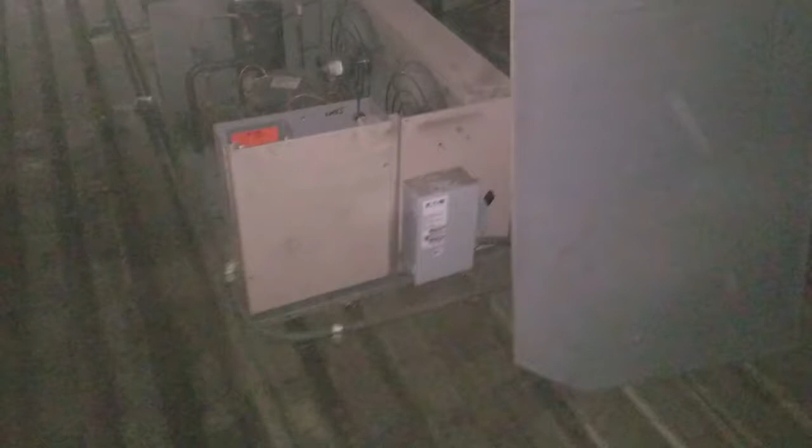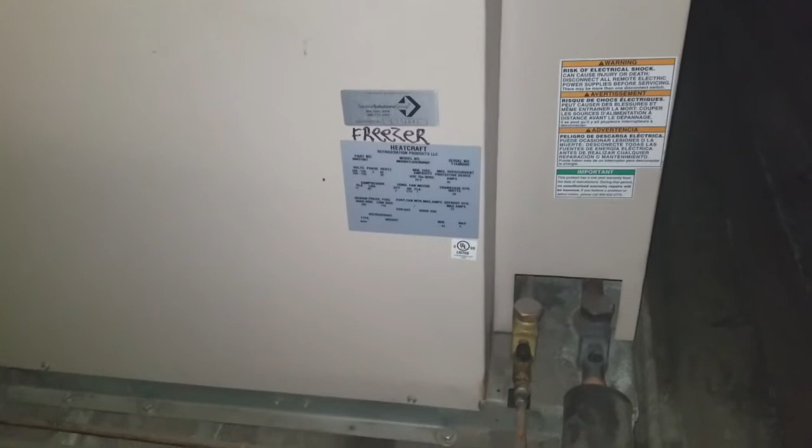So we've got a walk-in freezer that's not working properly. The complaint is that they're getting frost all over the walls of the unit. Upon arrival, I did not see any ice on the walls. However, I did notice that the door hinges and closure are not closing the door properly.

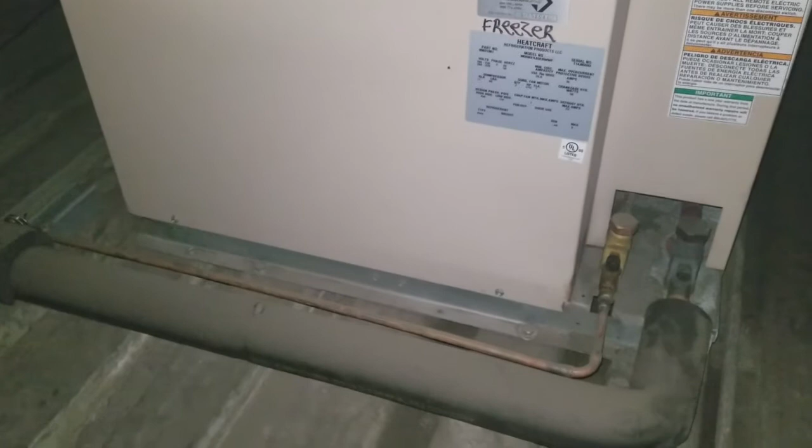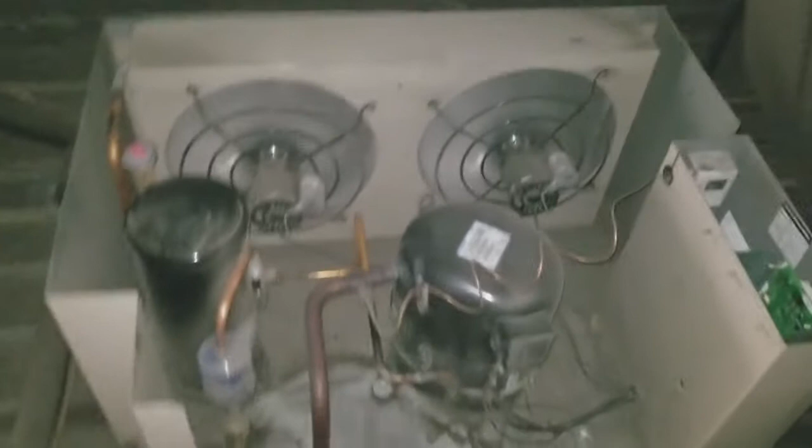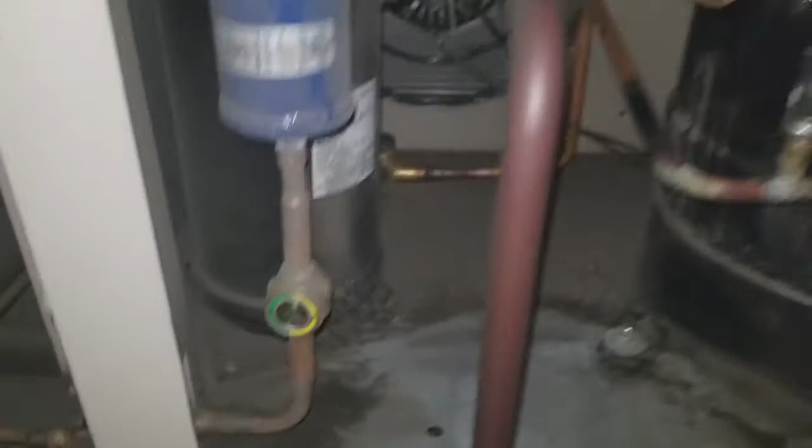They're currently doing a product rearrangement in the freezer, so I'm going to come up on the roof and check out the equipment. It's a Heatcraft condensing unit. So we've got a head pressure control valve. Sight glass currently looks clear. We'll go ahead and gauge up and check everything out.

So the first thing I noticed when I put these gauges on is that my superheat was a little bit high. Now, granted, this is the superheat at the compressor, currently at 46 degrees, but I'm going to go ahead and click over to the evaporator superheat, and you're going to see that's running actually kind of high too. So here we go, and we're at 20 degrees evaporator superheat. We want to be a lot closer to 8 degrees on this particular box.

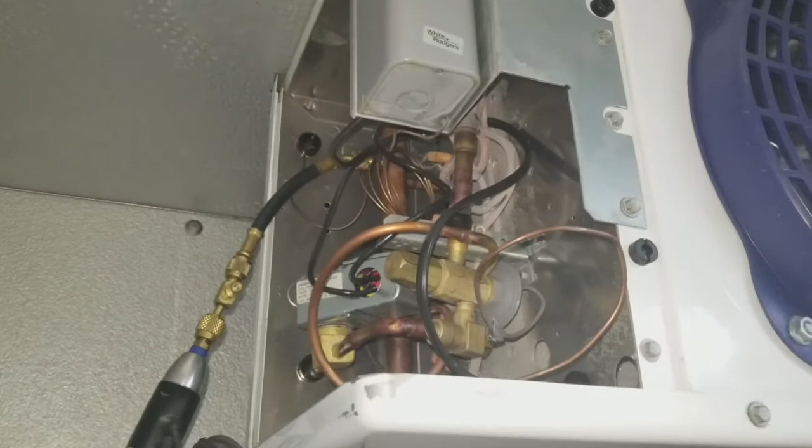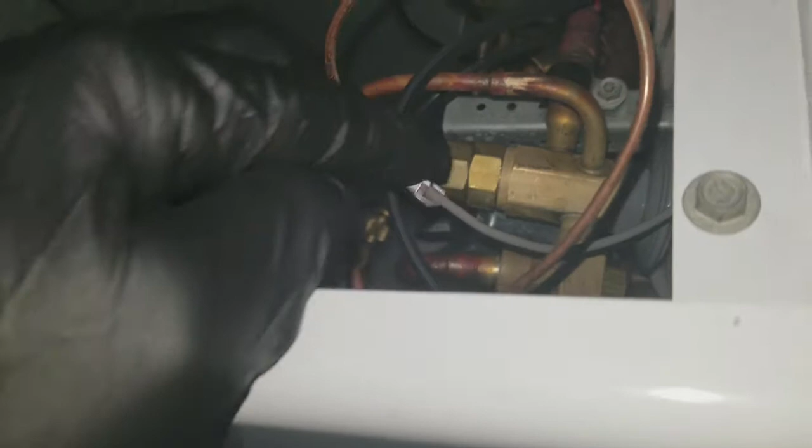So I went ahead and tried to adjust on the TXV, and no dice. It does not drop the superheat. There's something wrong with the TXV. So my walk-in freezer has too high evaporator superheat, and that expansion valve has been adjusted as far as it'll go. It's got a number 3 cartridge in it for 404. So we're going to recommend replacing that TXV.

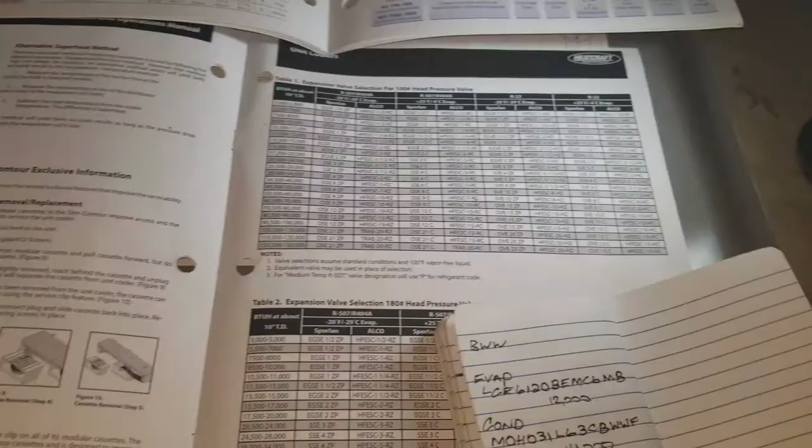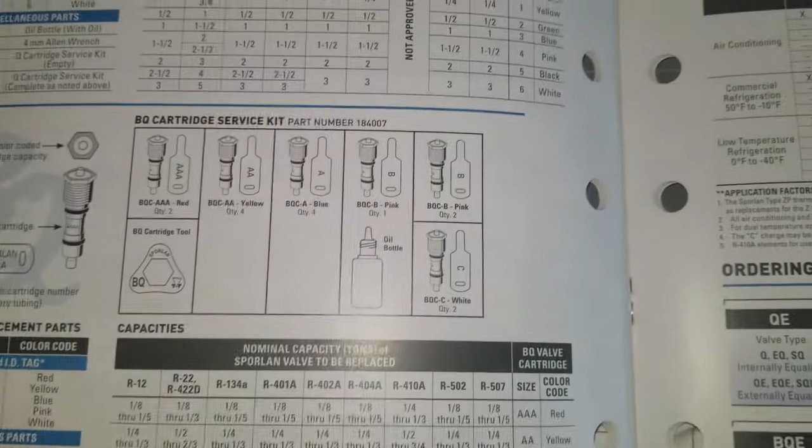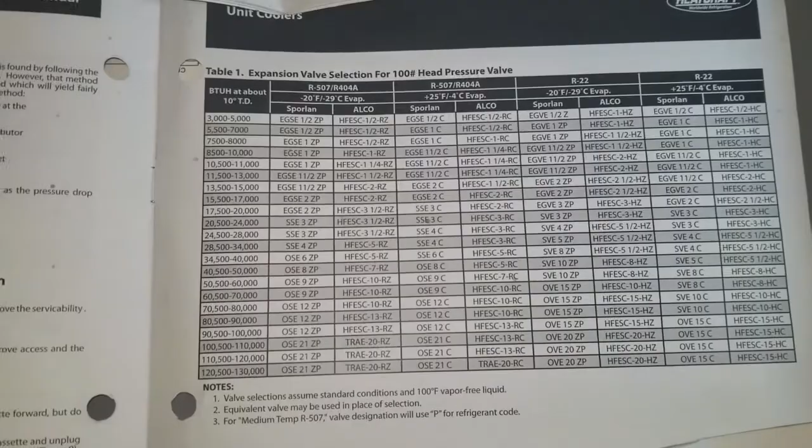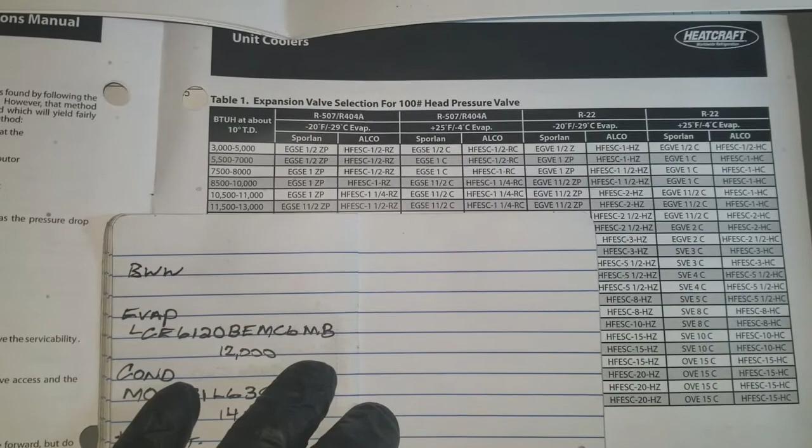So here's what we got. 12,000 BTU evaporator coil, 14,000 BTU condenser coil, a number 3 cartridge in the Sporlan Q body expansion valve. If you go to 404A refrigerant, the number 3 is a 1-ton valve. And if you go to Heatcraft and look what they call for, 12,000 BTU at a negative 20 evaporator, they call for a 1.5 ton.

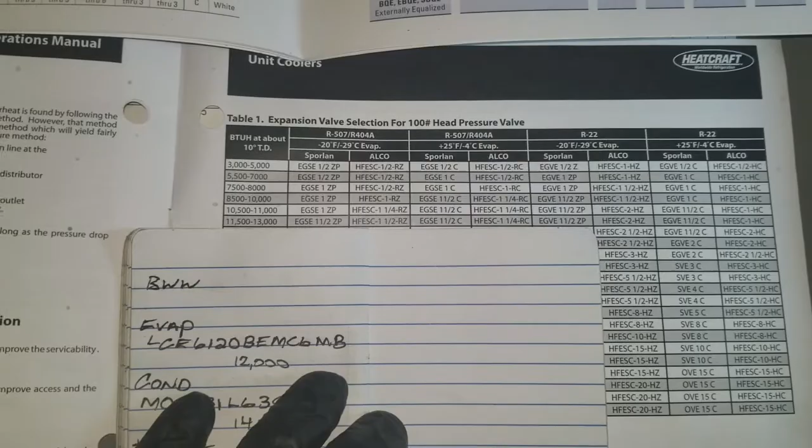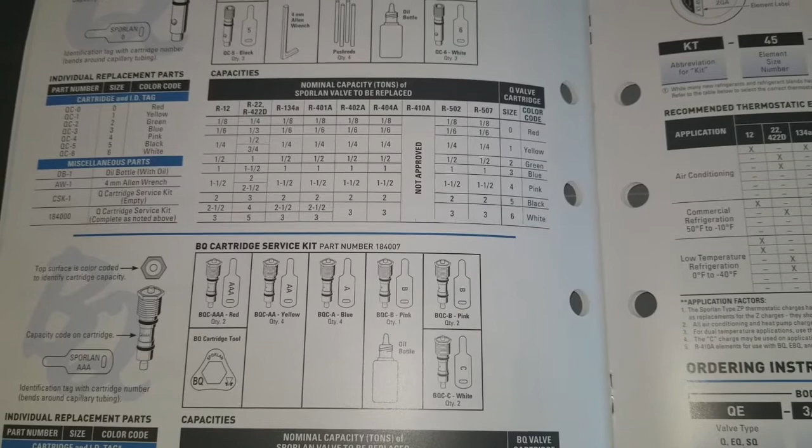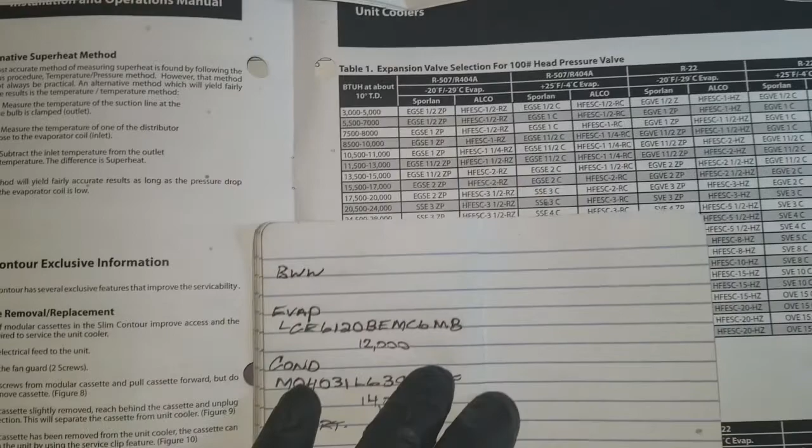So it looks like someone went a little small on the TXV. So we're going to need to up the size. So if we go up to a number 4 valve, or a number 4 cartridge for 404A, we would get a 1.5 ton, or that's what would be required. And if we go again to right here for 12,000 BTUs, it's asking for a 1.5 ton. So that would explain why our superheat is way too high, and we've got the valve adjusted and we can't get it any lower.

One of the cool things about digital gauges is you can do little experiments and see a little bit more into the system. So here I'm going to show you guys the operation of the head pressure control valve, or the headmaster. So I've got my probes hooked up to all different parts of the headmaster, basically all 3 sides of it, so I can measure the discharge line temp, the liquid line temp, and the liquid drain. So here's an example of a system where a headmaster is not bypassing.

Okay, I'm going to click on the high pressure. We've got a liquid line temperature of 75 degrees. We have a discharge line temperature of 118 degrees at the headmaster, and we have a liquid drain of 75 degrees. That's all at the headmaster right now. So here in a second, we're going to switch over to a bypassing headmaster.

And what I did was I actually wet the condenser to get it to simulate a bypassing headmaster. Not really simulate, but it made it happen. So here we go. The condenser's wet. I have a 71 degree liquid line temperature, 136 degree discharge line temperature, and a 55 degree liquid drain coming out the bottom of the condenser. So you can actually see the headmaster bypassing. Just thought that was cool.

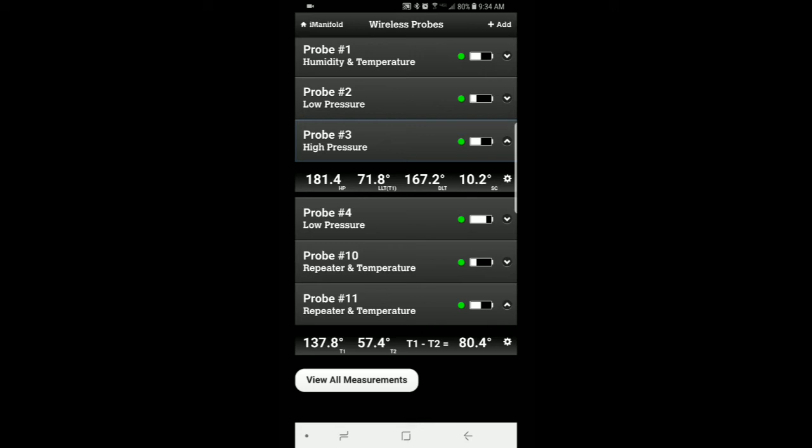To recap, service call, walk-in freezer, having frost on the walls, didn't find any when I got here, found that the door was not shutting properly, and then also found that we had an expansion valve that was originally installed that was too small.